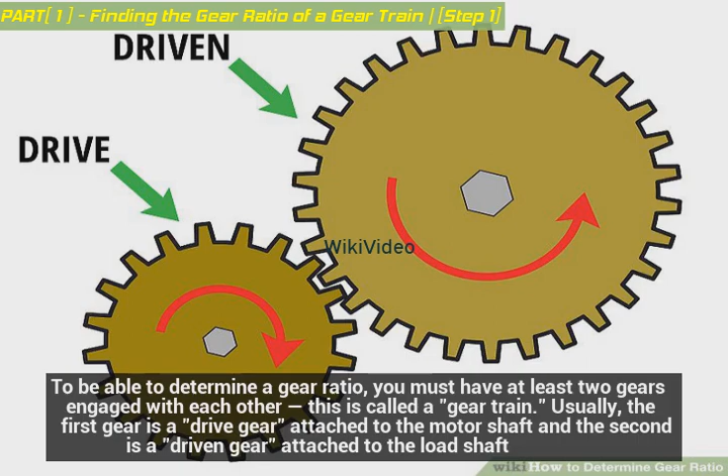To be able to determine a gear ratio, you must have at least two gears engaged with each other. This is called a gear train. Usually, the first gear is a drive gear attached to the motor shaft and the second is a driven gear attached to the load shaft. There may also be any number of gears between these two to transmit power from the drive gear to the driven gear. These are called idler gears.

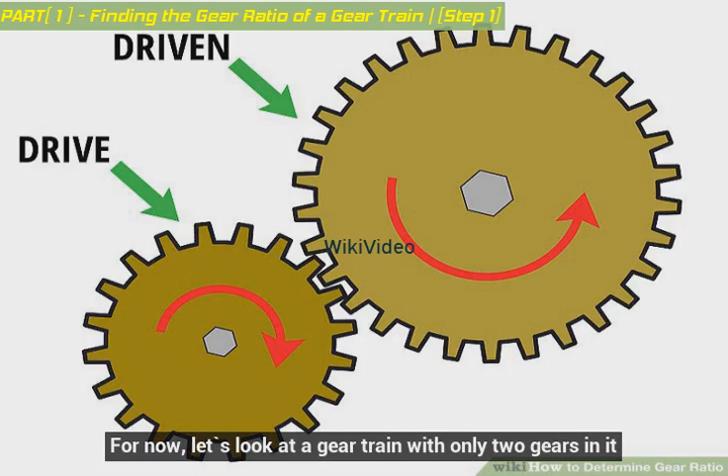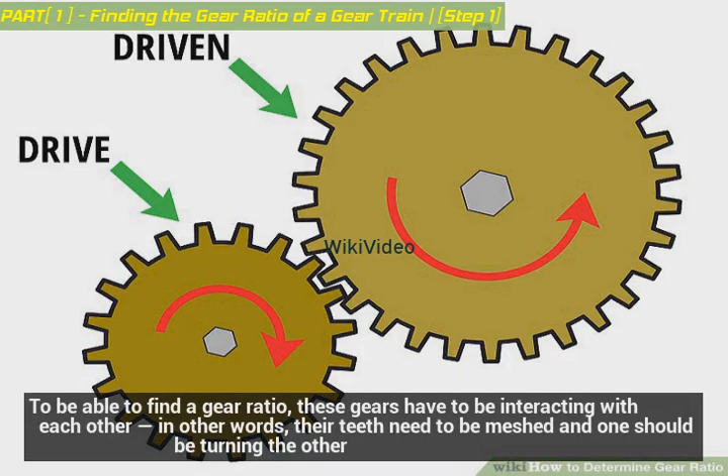For now, let's look at a gear train with only two gears in it. To be able to find a gear ratio, these gears have to be interacting with each other, in other words, their teeth need to be meshed and one should be turning the other.

For example purposes, let's say that you have one small drive gear, gear 1, turning a larger driven gear, gear 2.

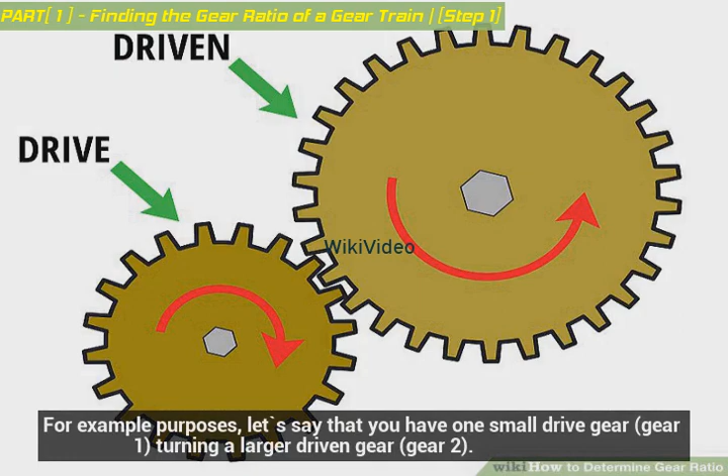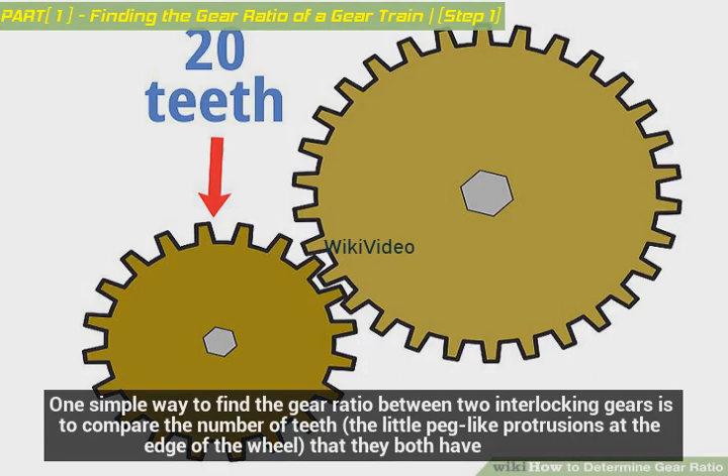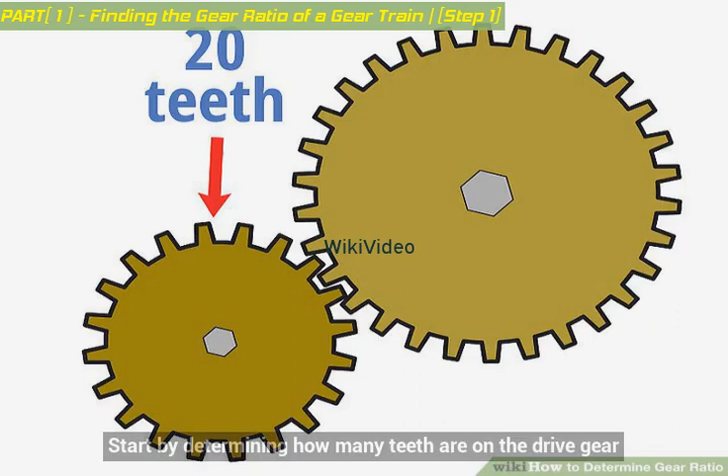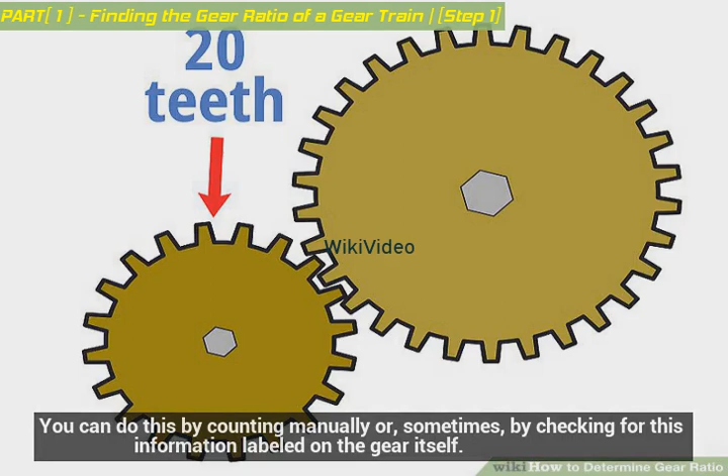Count the number of teeth on the drive gear. One simple way to find the gear ratio between two interlocking gears is to compare the number of teeth, the little peg-like protrusions at the edge of the wheel, that they both have. Start by determining how many teeth are on the drive gear. You can do this by counting manually or, sometimes, by checking for this information labeled on the gear itself. For example purposes, let's say that the smaller drive gear in our system has 20 teeth.

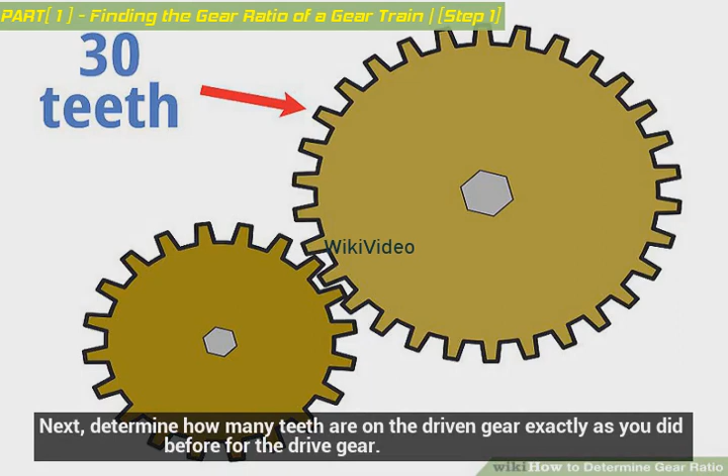Count the number of teeth on the driven gear. Next, determine how many teeth are on the driven gear exactly as you did before for the drive gear. Let's say that, in our example, the driven gear has 30 teeth.

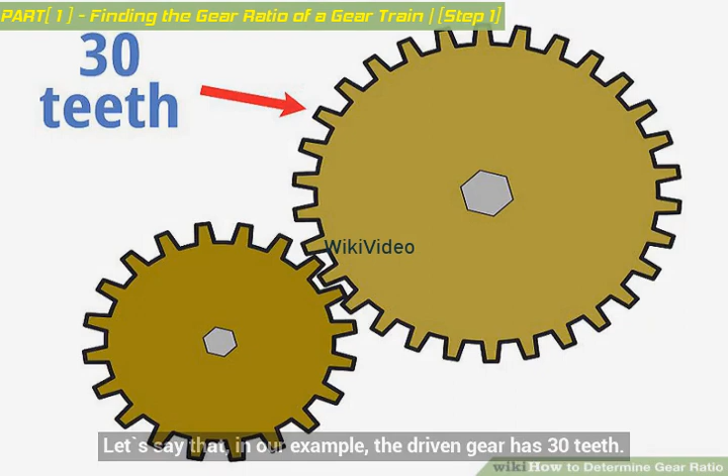Divide one teeth count by the other. Now that you know how many teeth are on each gear, you can find the gear ratio relatively simply. Divide the driven gear teeth by the drive gear teeth. Depending on your assignment, you may write your answer as a decimal, a fraction, or in ratio form, i.e., x:y.

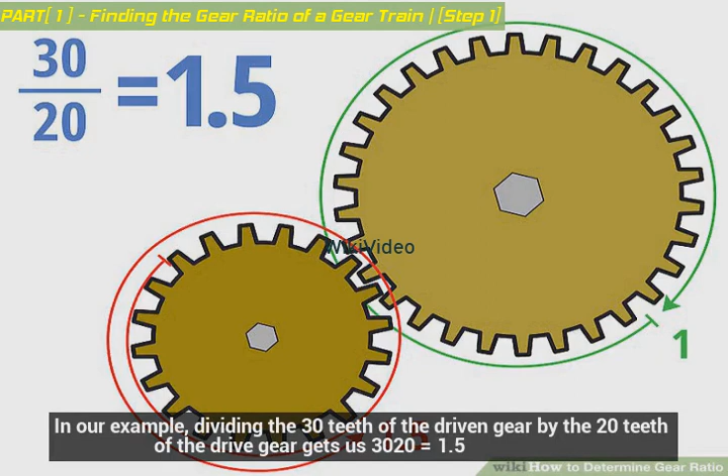In our example, dividing the 30 teeth of the driven gear by the 20 teeth of the drive gear gets us 30/20 equals 1.5. We can also write this as 3/2 or 1.5:1, etc.

What this gear ratio means is that the smaller driver gear must turn 1.5 times to get the larger driven gear to make one complete turn. This makes sense, since the driven gear is bigger, it will turn more slowly.

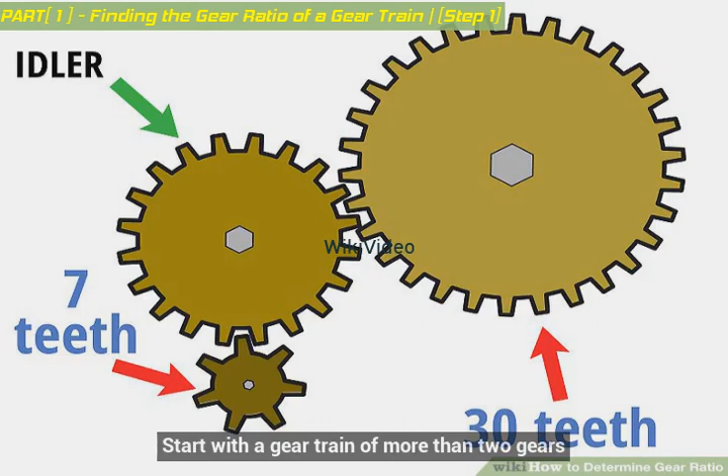Start with a gear train of more than two gears. As its name suggests, a gear train can also be made from a long sequence of gears, not just a single driver gear and a single driven gear.

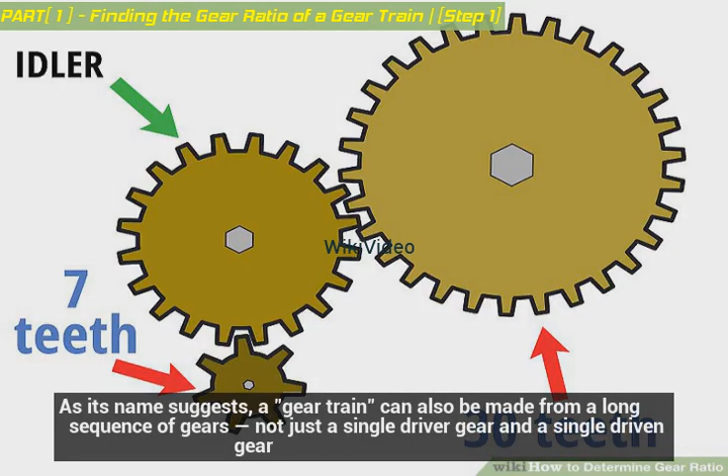In these cases, the first gear remains the driver gear, the last gear remains the driven gear, and the ones in the middle become idler gears. These are often used to change the direction of rotation or to connect two gears when direct gearing would make them unwieldy or not readily available.

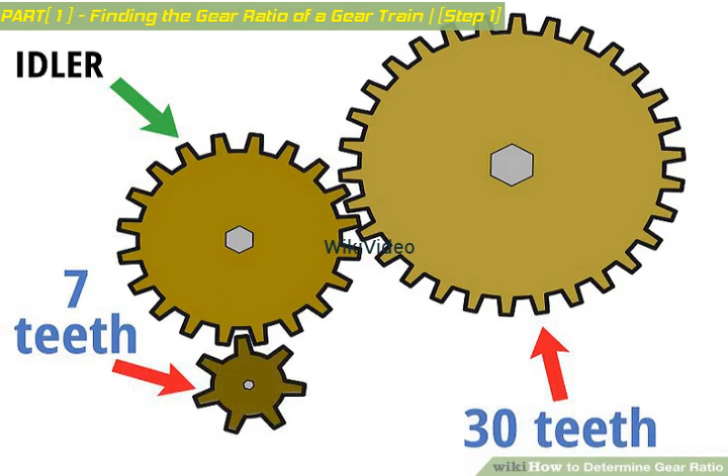Let's say for example purposes that the two-gear train described above is now driven by a small 7-toothed gear. In this case, the 30-toothed gear remains the driven gear and the 20-toothed gear, which was the driver before, is now an idler gear.

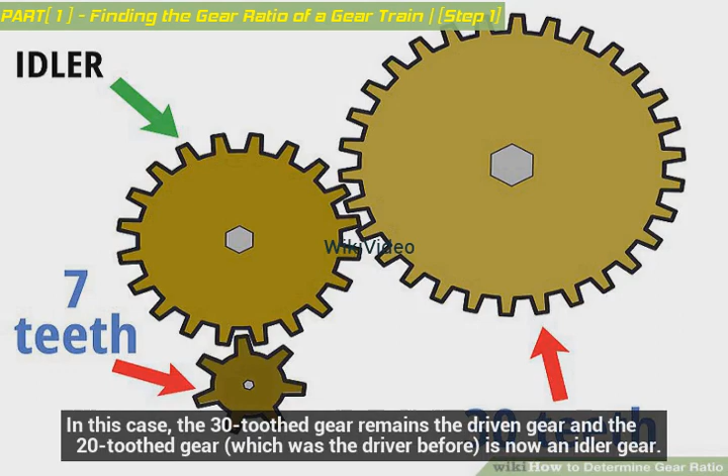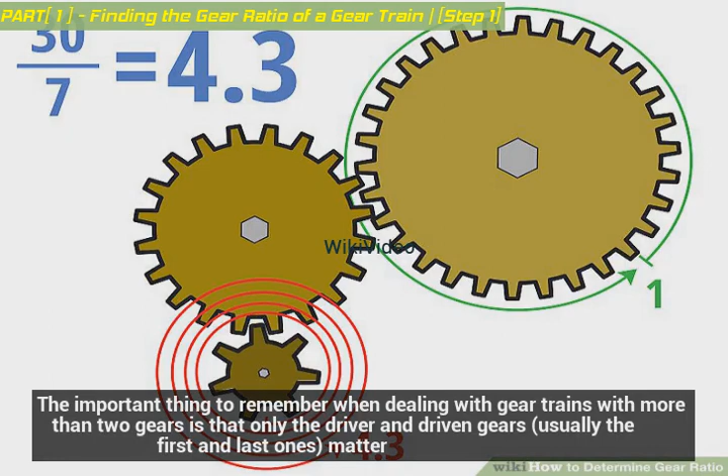Divide the teeth numbers of the drive and driven gears. The important thing to remember when dealing with gear trains with more than two gears is that only the driver and driven gears, usually the first and last ones, matter. In other words, the idler gears don't affect the gear ratio of the overall train at all. When you've identified your driver gear and your driven gear, you can find the gear ratio exactly as before.

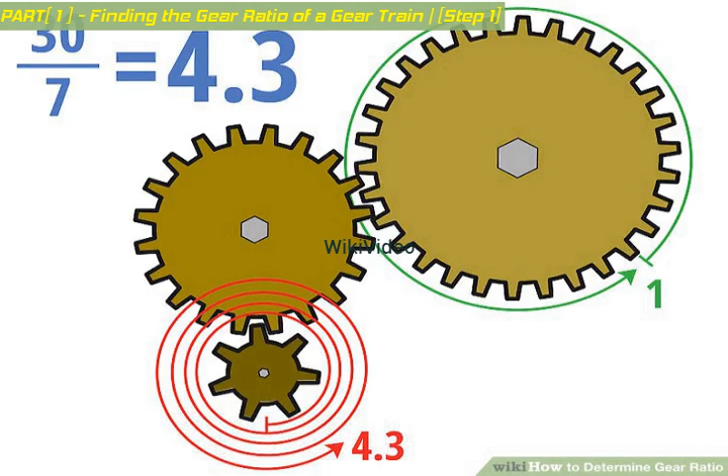In our example, we would find the gear ratio by dividing the 30 teeth of the driven gear by the 7 teeth of our new driver. 30/7 equals about 4.3 or 4.3 to 1, etc. This means that the driver gear has to turn about 4.3 times to get the much larger driven gear to turn once.

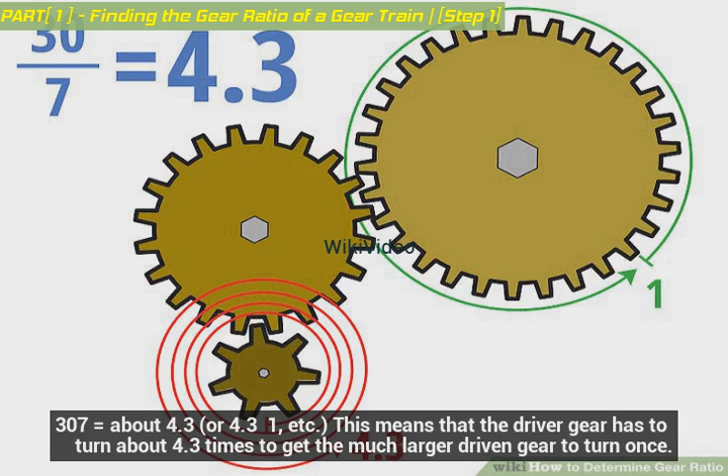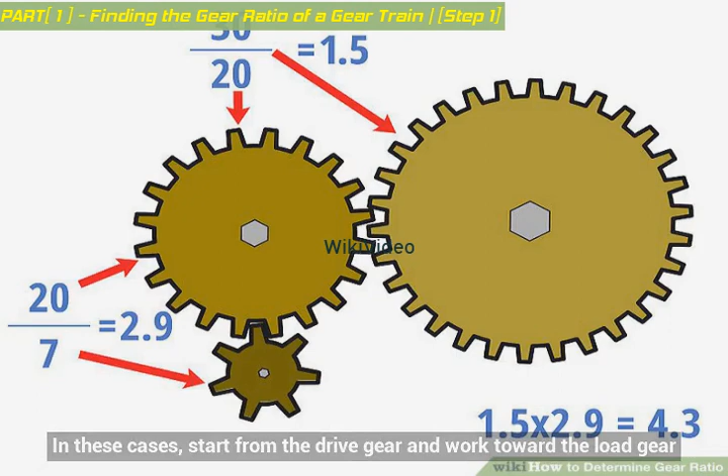If desired, find the gear ratios for the intermediate gears. You can find the gear ratios involving the idler gears as well, and you may want to in certain situations. In these cases, start from the drive gear and work toward the load gear. Treat the preceding gear as if it were the drive gear as far as the next gear is concerned.

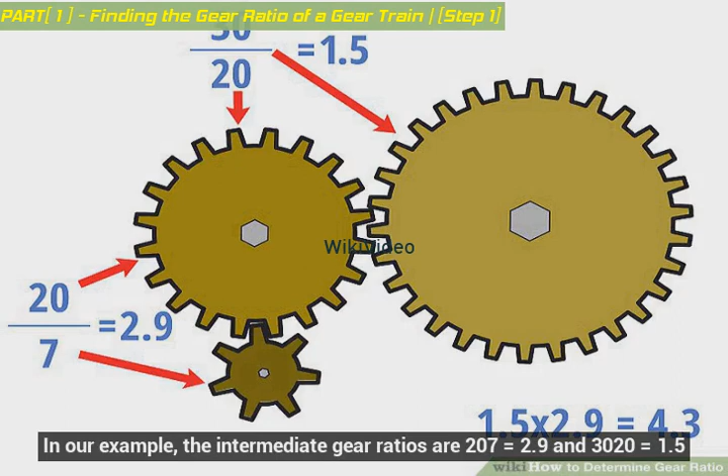Divide the number of teeth on each driven gear by the number of teeth on the drive gear for each interlocking set of gears to calculate the intermediate gear ratios. In our example, the intermediate gear ratios are 20/7 equals 2.9 and 30/20 equals 1.5. Note that neither of these are equal to the gear ratio for the entire train, 4.3. However, note also that 20/7 times 30/20 equals 4.3.

In general, the intermediate gear ratios of a gear train will multiply together to equal the overall gear ratio.

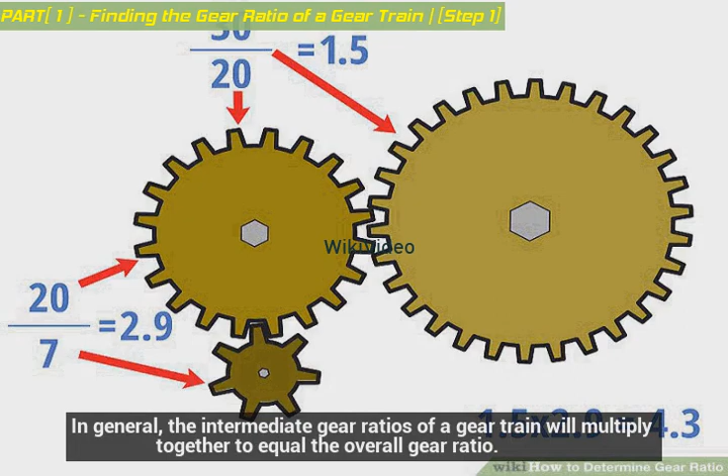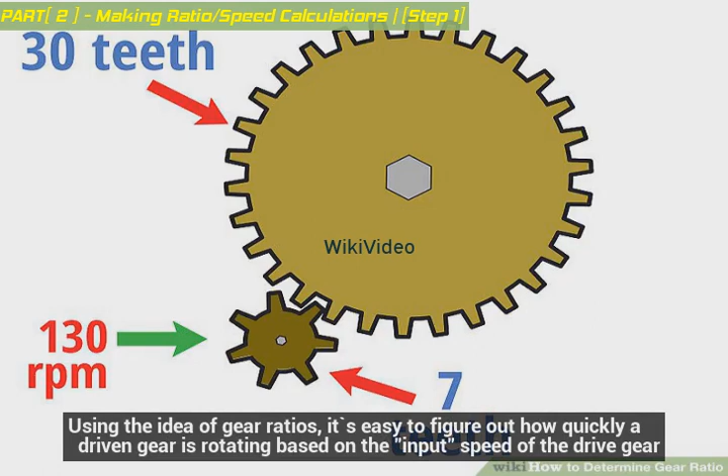Find the rotational speed of your drive gear. Using the idea of gear ratios, it's easy to figure out how quickly a driven gear is rotating based on the input speed of the drive gear. To start, find the rotational speed of your drive gear. In most gear calculations, this is given in rotations per minute (rpm), though other units of velocity will also work.

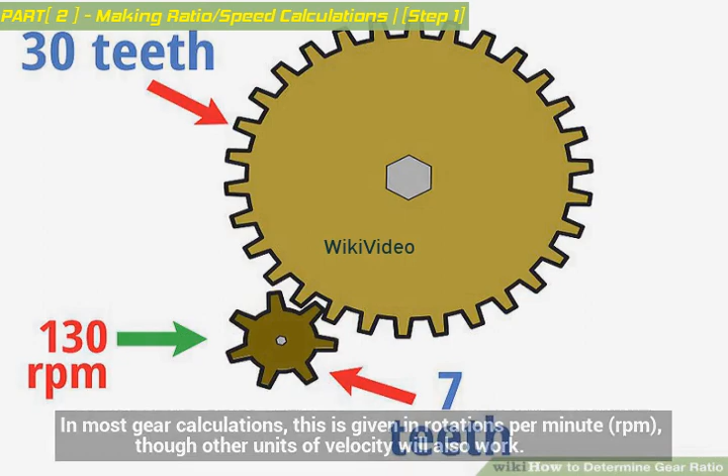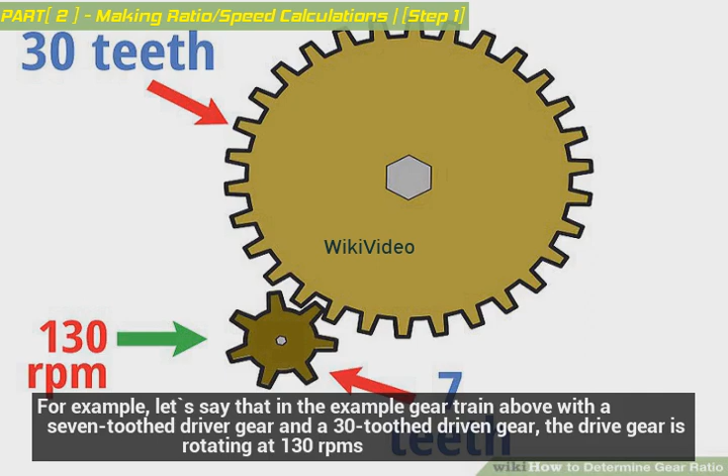For example, let's say that in the example gear train above with a 7-toothed driver gear and a 30-toothed driven gear, the drive gear is rotating at 130 rpm. With this information, we'll find the speed of the driven gear in the next few steps.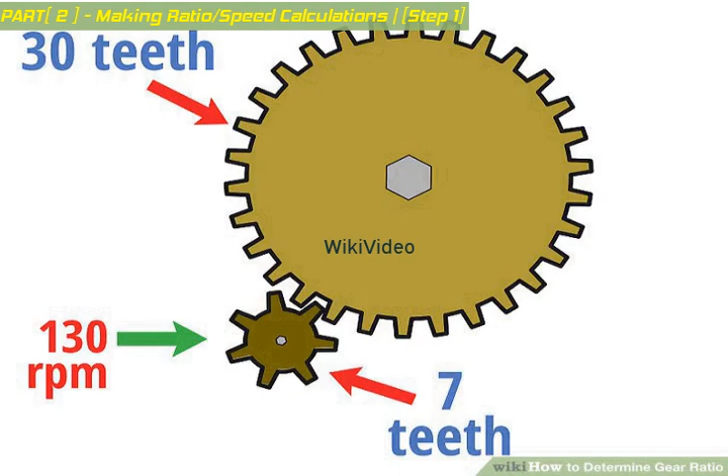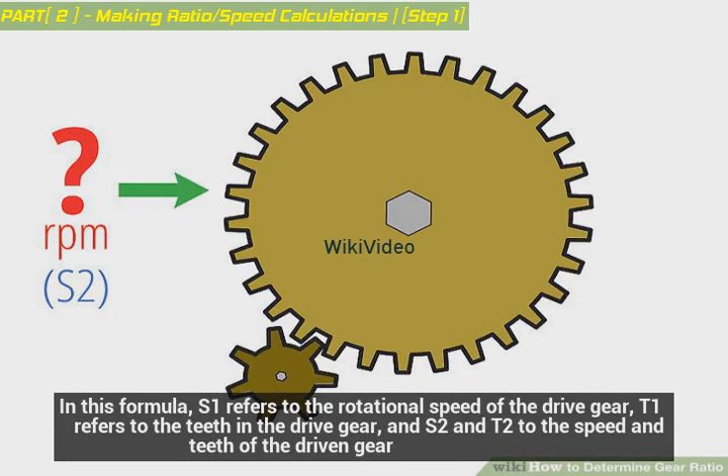Plug your information into the formula S1 times T1 equals S2 times T2. In this formula, S1 refers to the rotational speed of the drive gear, T1 refers to the teeth in the drive gear, and S2 and T2 to the speed and teeth of the driven gear.

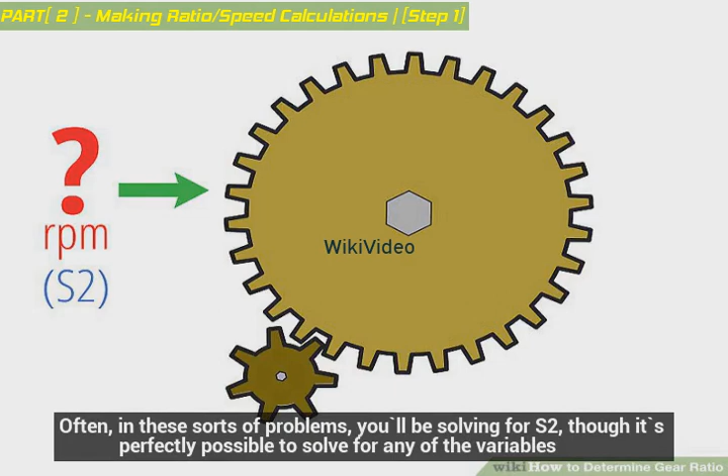Fill in the variables until you have only one left undefined. Often, in these sorts of problems, you'll be solving for S2, though it's perfectly possible to solve for any of the variables. In our example, plugging in the information we have, we get this: 130 rpm times 7 equals S2 times 30.

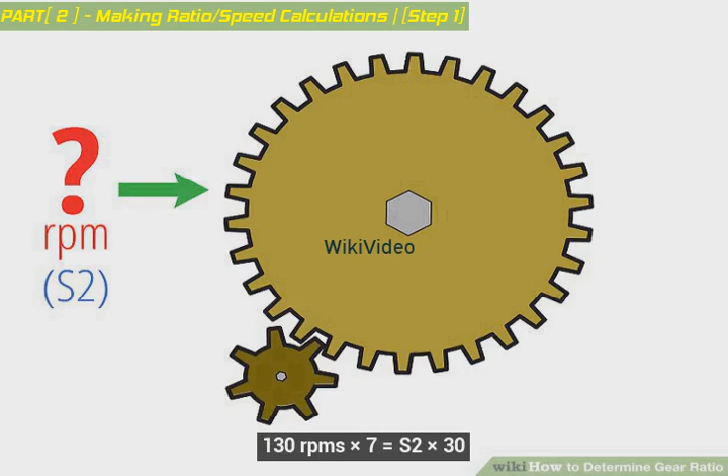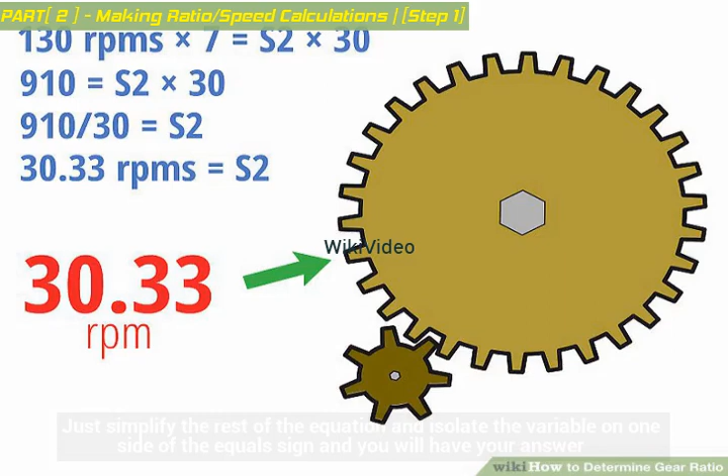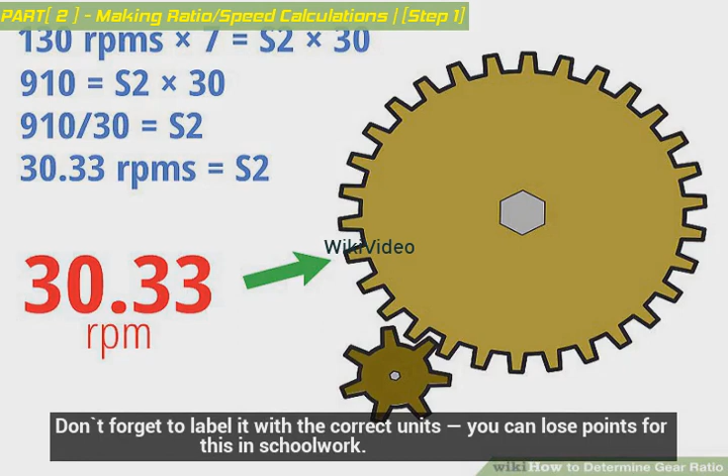Solve. Finding your remaining variable is a matter of basic algebra. Just simplify the rest of the equation and isolate the variable on one side of the equals sign and you will have your answer. Don't forget to label it with the correct units, you can lose points for this in schoolwork.

In our example, we can solve like this: 130 rpm times 7 equals S2 times 30. 910 equals S2 times 30. 910 over 30 equals S2. 30.33 rpm equals S2.

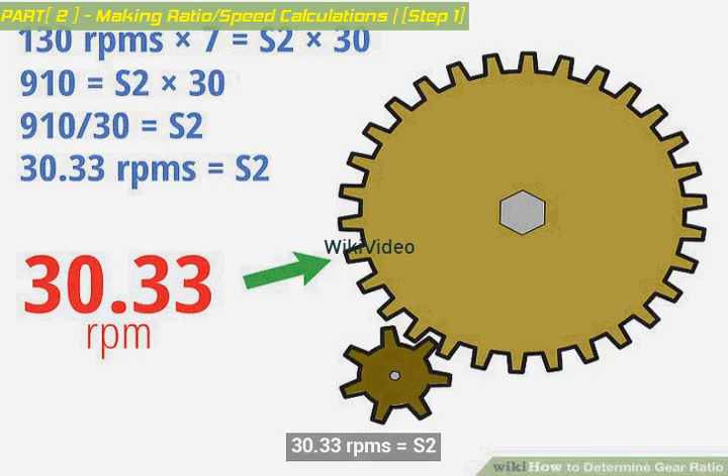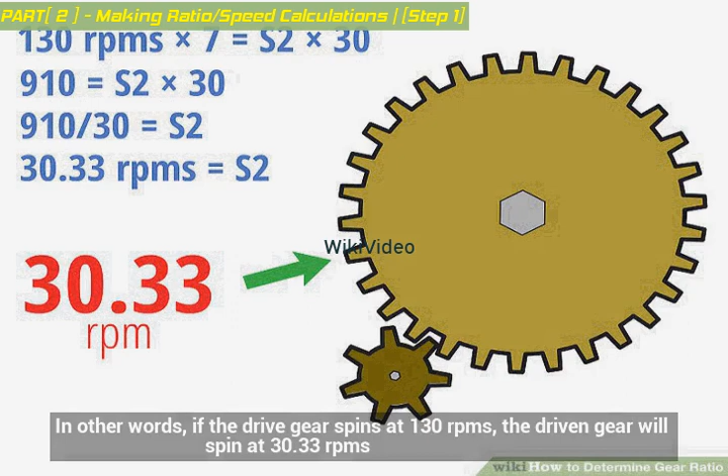In other words, if the drive gear spins at 130 rpm, the driven gear will spin at 30.33 rpm. This makes sense, since the driven gear is much bigger, it will spin much slower.